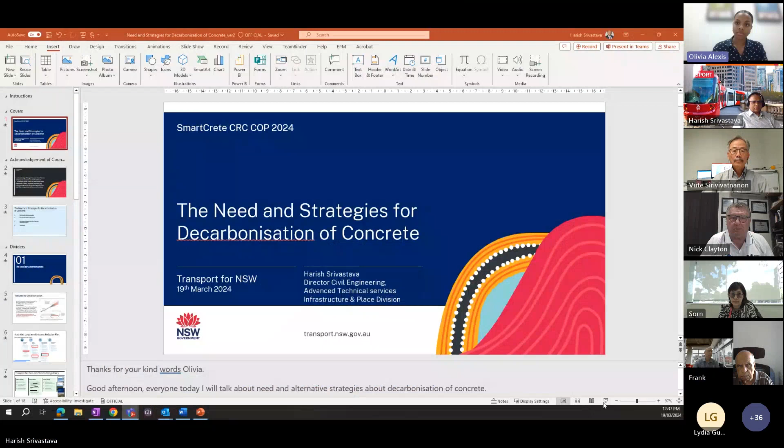Thank you, thanks Olivia. I'll try to share my screen. Please let me know if you can see it. Can you see it well? That's perfect. Thanks Harish.

Okay, thanks Olivia for your kind words. Good afternoon everyone. Today I'll talk about, at a high level, decarbonization, where I'll touch on both the need and strategies for decarbonization of concrete, to be specific.

Before I go any further, I would like to acknowledge the traditional custodians of the land. Today I'm speaking from Ashfield, which is the land of the Wangal people. So I acknowledge the Wangal clan of the Eora Nation and pay my respect to the traditional custodians of the land on which we meet, especially elders past and present, and acknowledge other Aboriginal people here and their respective cultures and nations.

The content of the presentation is in three parts. One, I'll talk about decarbonization in general, then drill down into why decarbonization of concrete is required, and then how SmartCrete CRC research projects help with this decarbonization.

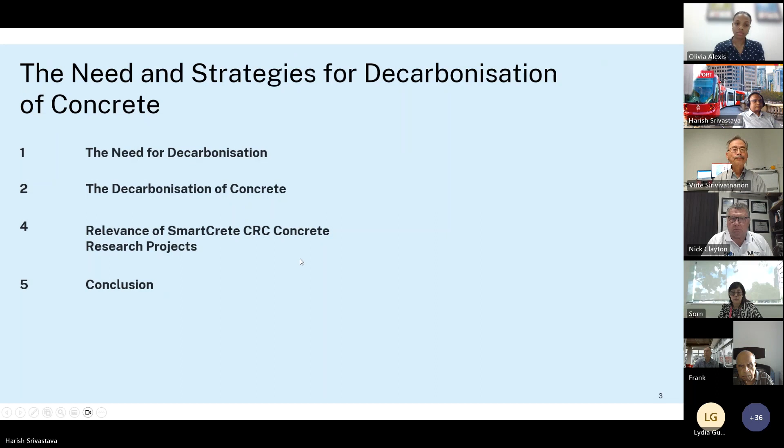So first is about the need for decarbonization. As all of us know, signatories of the Paris Agreement need to contain global warming to 2 degrees Celsius above pre-industrial level, whereas the preferred level envisaged is 1.5 degrees Celsius. What got me a bit concerned reading the IPCC 2021 report is that it envisages a 50% likelihood of exceeding 1.5 degrees Celsius in the near term. So that means we need to do something to contain global warming.

Global warming or carbon dioxide emissions is a bit of a buzzword, so I tried to establish a linkage between the two. If you look at the picture on the right, taken from the IPCC 2021 report, it essentially establishes the relationship between global warming and carbon dioxide emissions. Without getting into the nitty-gritty of the graphs, curves, and sectoral emissions, I'll try to contain myself to construction sector related matters.

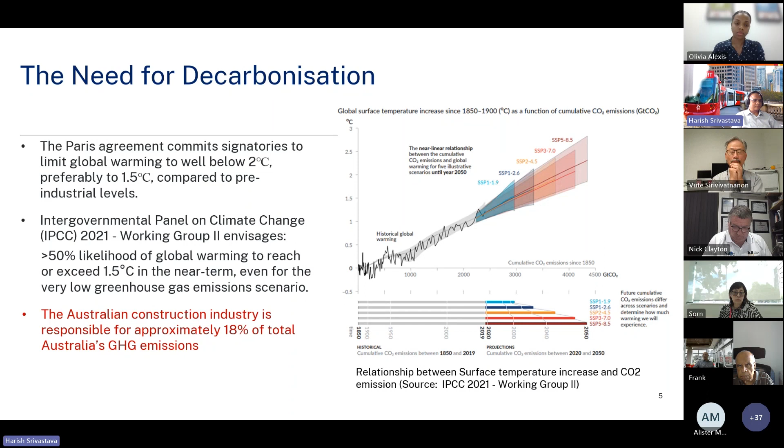The Australian construction sector is responsible for about 18% of Australia's greenhouse gas emissions, so this is a critical part of the net zero equation. This is the Commonwealth government's long-term emission reduction plan, with four streams and a lot of initiatives. I've highlighted in red the initiatives related to the construction sector - for example, low emission steel and aluminum is very much essential for construction sector decarbonization.

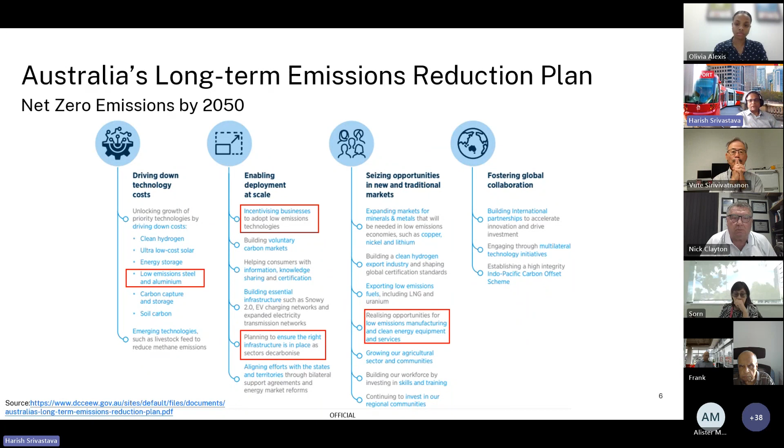Similarly, probably one of the ways we can encourage decarbonization is by incentivizing businesses. I don't intend to read every box, but this draws from top to bottom so that we have a bit of context setting.

Drawing on this Commonwealth government plan, Transport has developed these sub-plans as part of its decarbonization policy. You're welcome to read these at your own leisure - I've just put some snapshots so you get the title and name of the documents, and they are available publicly. Essentially, the policy is to drive both operational and embodied carbon to net zero by 2050.

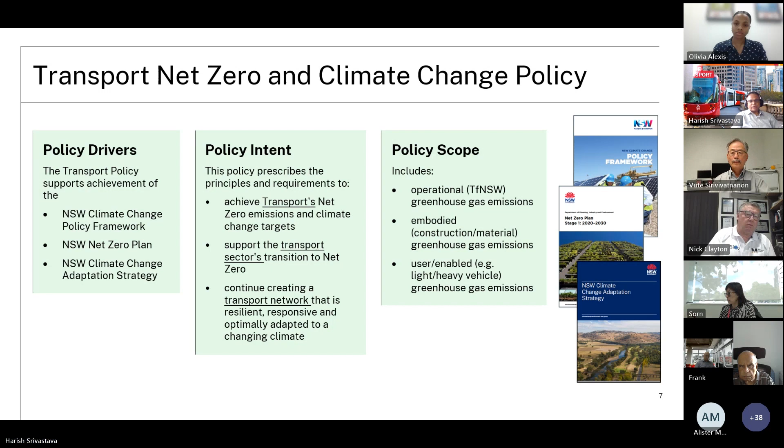Going a step further, Transport recently published an updated version of the policy including its commitment. Transport is committed to...

Transport's commitment is to achieve net zero for embodied carbon emission by 2045, and sector-wide net zero emission by 2050. But this will be done in a staged manner, and this slide highlights the stage plan. I don't intend to go line by line, but the message is we are trying to achieve carbon net zero in stages.

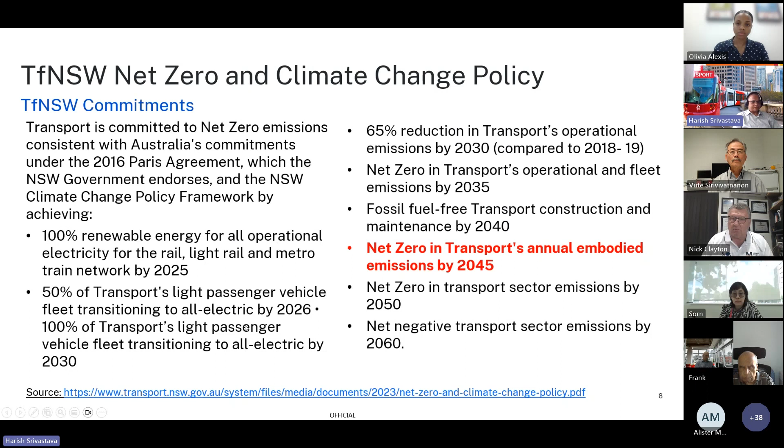Now I'll talk about something engineers like more - how we can achieve decarbonization of concrete. The first logical question is, why concrete? Looking at all construction materials, concrete has one of the lowest embodied carbon footprints compared to materials like steel and aluminum. Whereas we use a lot of concrete, and that's why it becomes a critical material.

There are some numbers here - 29 million cubic meters of concrete used in Australia. Focusing on structural concrete, the carbon footprint of concrete is anything between 230 to 615 kilograms per cubic meter. Combining the two, about 12 million tons of CO2 is basically associated with concrete. Looking at the picture on the right, out of all these materials, Portland cement is the highest emitting material in concrete. Though we use only 12 to 15% cement in concrete, it is responsible for about 90% of the CO2 - that's why most strategies revolve around eliminating or reducing Portland cement.

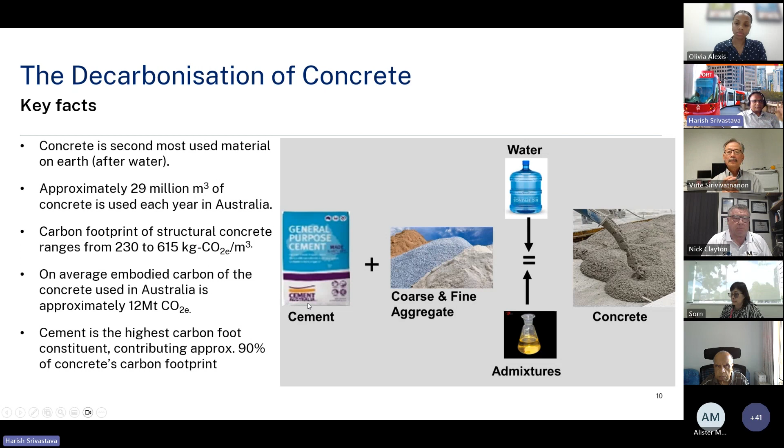At the moment, the impetus is partially replacing cement with SCM. Everybody talks about more SCM, but I guess we probably need to embrace new zero cement technologies like geopolymer concrete, sulfur concrete, LC3, just to name a few.

Then going up in the cycle, the next one is water. At the moment we use recycled water and steam curing, but probably we need to move to CarbonCure type technology, where we inject carbon dioxide both while batching and during the curing process. The advantage of this is, first, it locks the carbon dioxide into the concrete, supporting carbon storage. Some papers have reported up to 20% strength improvement can be achieved by injecting carbon dioxide, so it has a dual benefit.

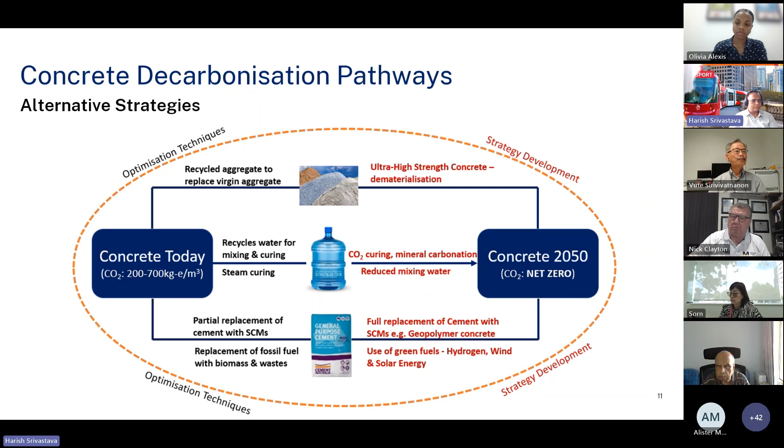Now I'll try to link up that circular diagram with whatever project transport is involved with the SmartCrete CRC. If we look at these five projects on screen, they can potentially be categorized into generating new aggregate by using recycled material - for example, recycled glass, plastic waste, mine waste. These were not conventional aggregates, so we get into manufactured aggregate.

Then the other important thing is using, say, bottom ash. We use fly ash a lot, but bottom ash is probably another potential material that can be used both as aggregate as well as SCM.

We are also trying to develop some new stream of SCMs, for example this manufactured amorphous silica. This is an interesting project because it comes out of the carbon dioxide injection process, so its source is carbon dioxide injection. The overall process is intending to absorb and store the carbon dioxide, and the byproduct is amorphous silica, which we are trying to use in concrete both as SCM as well as aggregate.

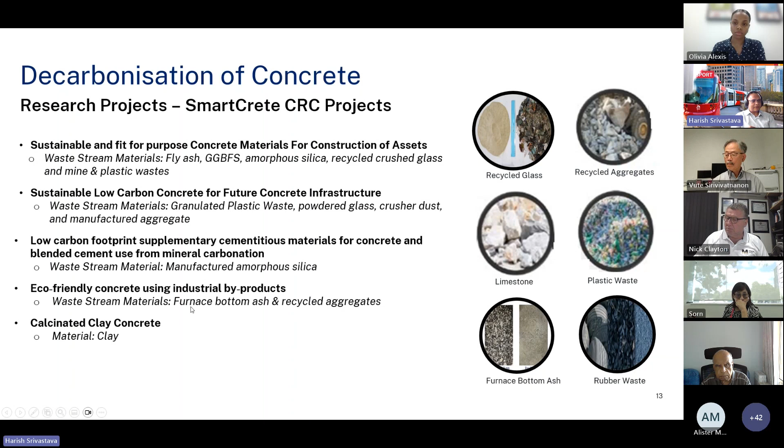Another thing not on this slide, because this project is in development - we are trying to develop a project for design guides and specifications for ultra high performance concrete to be used in infrastructure, which will support decarbonization.

Then there are a couple of interesting projects - the first one Professor Vute will talk about a lot in his presentation, so I don't want to double up, but the intention is to develop a framework for selecting low carbon concrete. We are not trying to stop at the current generation of concrete mixes, but want to go into future mixes as well.

Then this is another interesting project which draws on the potential 6% recarbonization envisaged by VDZ. This project has a tier 2 calculation about CO2 absorption into concrete, so I think this will be a good fit for the net zero solution.

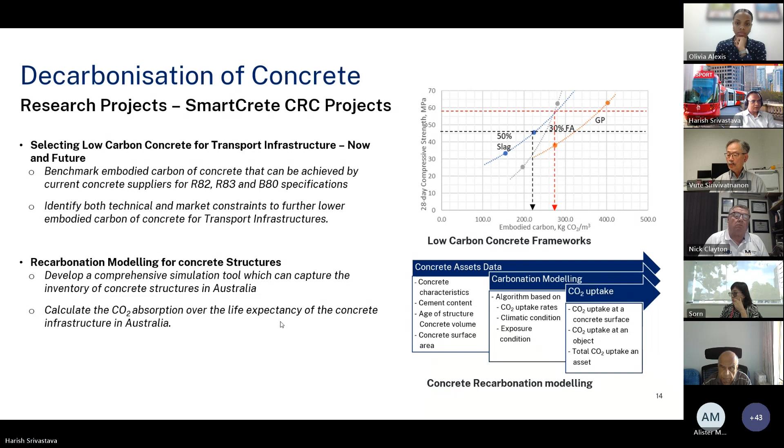So in short, I discussed various transport initiatives, policies and commitments which support net zero. Then I explained that the transport collaboration with the SmartCrete CRC is likely to generate new materials, new SCMs, and also underpin dematerialization.

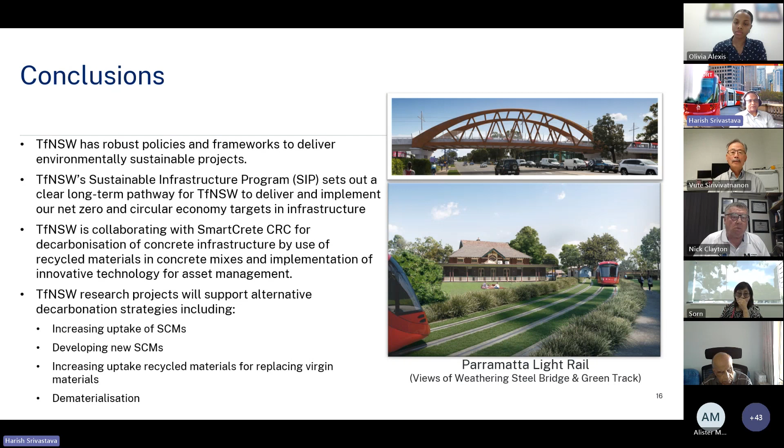Perfect. Thank you so much, Harish. Really interesting work. It's good to know what Transport New South Wales is doing currently and where they see the next stages to this industry collective goal in regards to how we're going to reduce and decarbonize our industry.

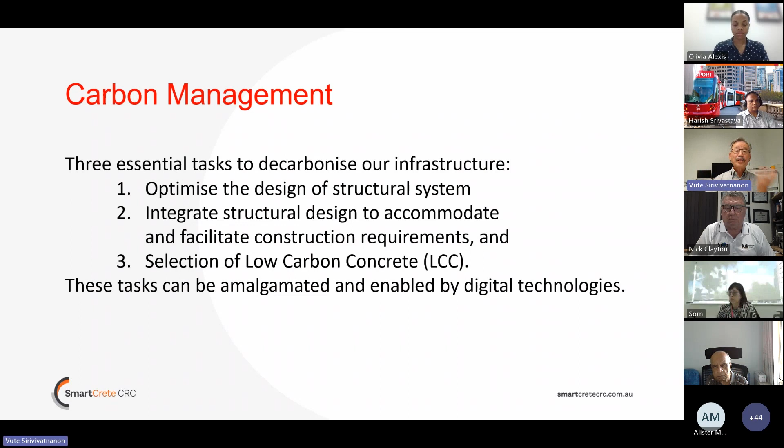My definition of low carbon concrete is very simple and straightforward. Low carbon concrete is user-friendly type of concrete with good workability, constructability, and safety in handling and so forth as well. It must have the mechanical and volume stability properties that are required for the structures in question. And finally, it must have the durability properties related to the design life required for that particular structure in the particular exposure environment in question. Now, all these must be achieved at the lowest possible embodied carbon. So, a very simple definition of low carbon concrete.

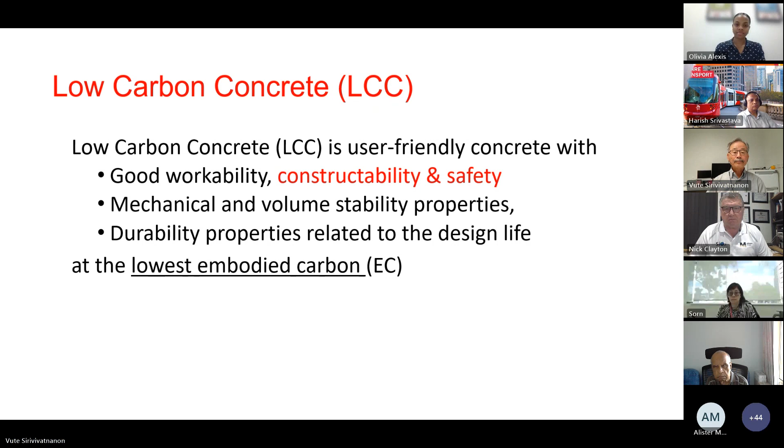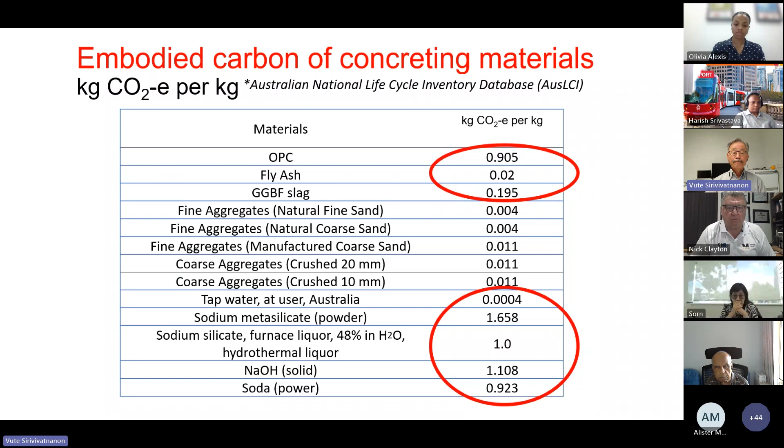And last of all, durability properties. Apart from the normal exposure, either carbonation-induced corrosion issue, chloride-induced corrosion issue, or sulfate, don't forget about the possible deterioration mechanism due to alkali-silica reactivity, and also the possibility of delayed ettringite formation, which may affect concrete that is cured at very high temperature.

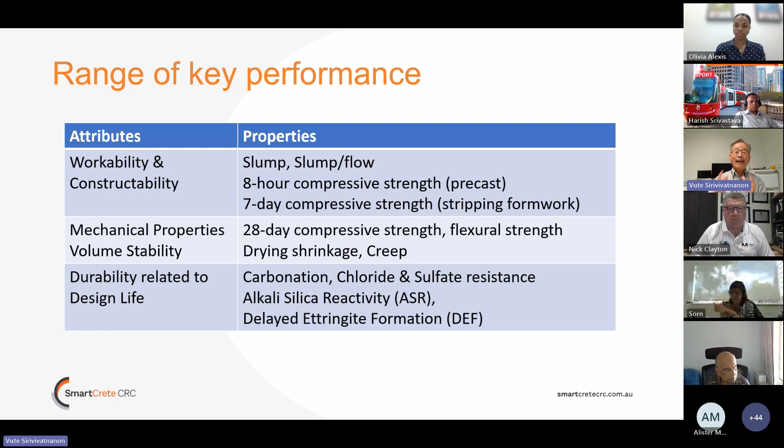Now, if we look at a typical specification for concrete, I use the example here of Transport for New South Wales B80 specification. And in particular, I just choose a particular exposure of B2. What you can see is that the specification consists of two parts. One is the prescriptive requirement in terms of cement content and water to cement ratio, as well as the performance-based requirement in terms of strength grade, and in this case, maximum chloride diffusion coefficients, depending on the specific test method that are required.

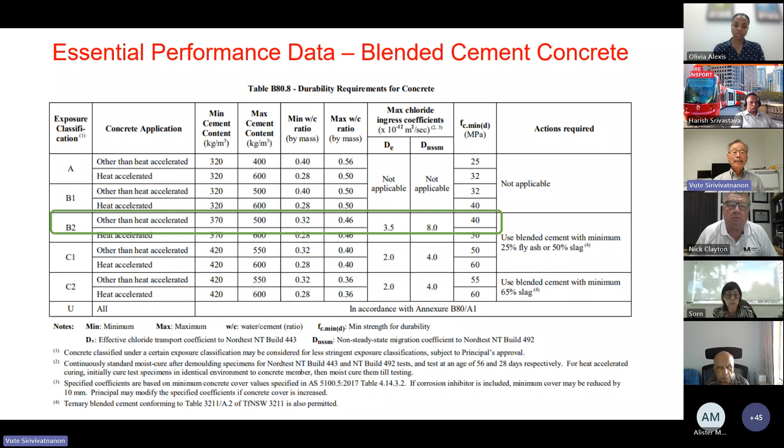I use this particular specification to show you that in the area of using SCM to produce blended cement concrete, the influence of the type of binder is so high insofar as it affects the embodied carbon of the concrete in question.

If you look at the 28-day strength, for instance, you can clearly see the influence of concrete with either just GP cement, 30% fly ash, or 50% slag on the embodied carbon of the concrete that will meet a particular strength grade requirement. In this case, the slag came up best with the embodied carbon just around 220 to 230 kilogram carbon dioxide per cubic meter of concrete.

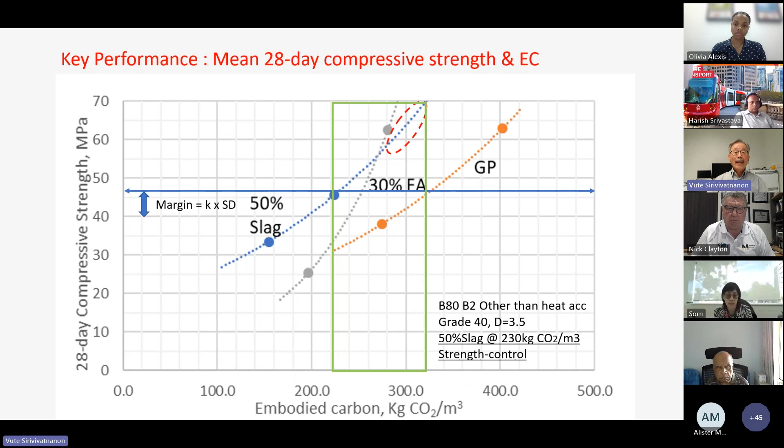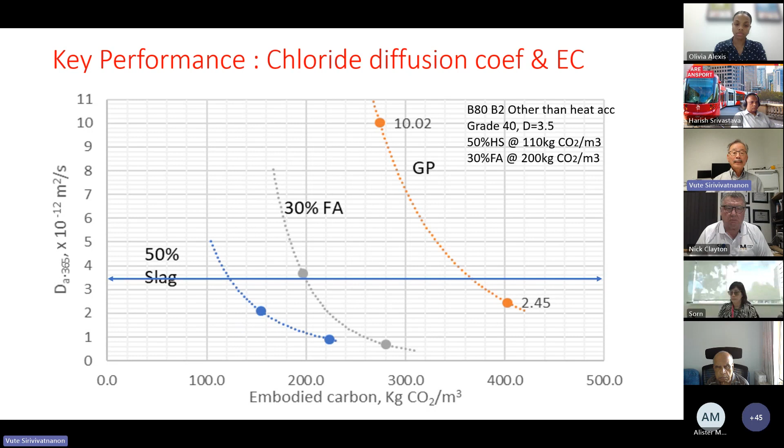Apart from strength and mechanical properties, we also require durability properties. Again, I show you the example of the influence of the type of binder on chloride diffusion, and what sort of embodied carbon would result from the choice of particular binder used to produce your concrete. In this case, looking at a diffusion coefficient of around 3.5 times 10 to the minus 12 meters squared per second, the 50% slag seemed to be the best among the three binder systems shown here.

At the end of the day, though, you need to choose the best concrete that meets all your performance requirements. I'm merely showing you two performance requirements here, 28-day compressive strength and chloride diffusion, and that's basically the combination of the two data sets I showed you earlier.

In this case, if you choose the 50% slag to produce a grade 40 concrete, it would demand about 230 kg of CO2, and that corresponding 50% slag mix will give you a diffusion value of around 1 times 10 to the minus 12 meters squared per second, well below what is specified. So in this example, it's the strength that basically controls the choice of your low carbon concrete needed for that particular exposure condition and application.

If this happened to be precast, the early strength may be the controlling factor. The point is that you need to look at all the performance requirements and the respective embodied carbon of the concrete you use to come up with concrete that meets all those performance requirements.

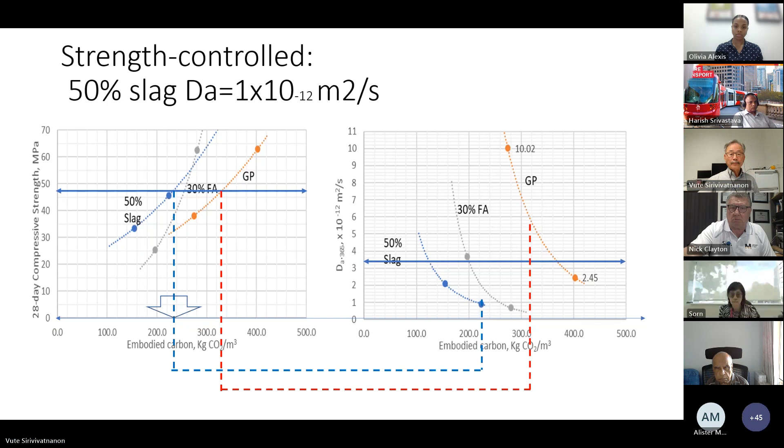I'll now quickly go through some of the data we have collected for geopolymer concrete. I'm sure most of you are aware that late last year, Standards Australia released the technical specification TS199, which covers the design of geopolymer and alkali-activated concrete structures. I think this particular technical specification would support greater confidence for engineers to start looking at the use of geopolymer concrete more seriously.

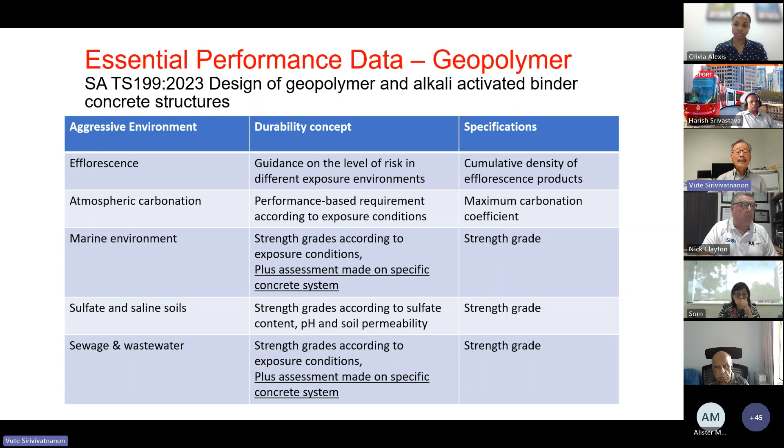I summarize the type of aggressive environment that has been defined, and also what type of durability concept is used in that technical specification 199. I would also show you just a couple of sets of data, showing the relationship between different geopolymer concrete and a range of other concrete with SCM on embodied carbon with respect to strength and durability.

Just an example: the circles with the darker color, whether black or blue, represent the geopolymer concrete. You can see that for the sort of strength we are looking at, geopolymer concrete would give a much lower embodied carbon than the sort of concrete I've just shown you in terms of concrete with high SCM. So it's a very good start in terms of strength.

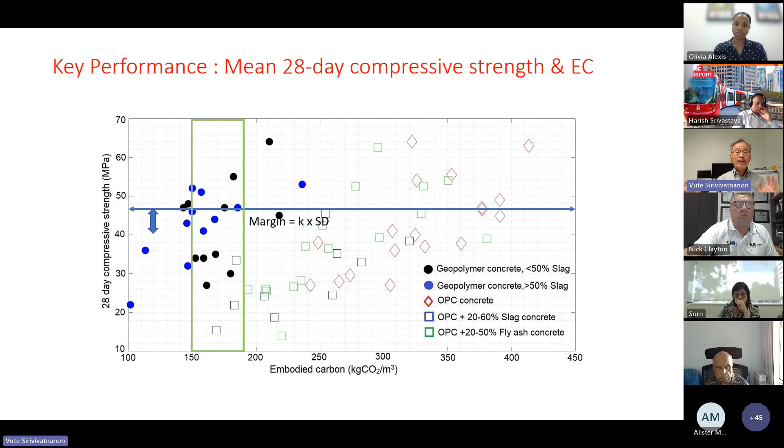Now, if we look at durability, in terms of chloride coefficient, but this is using test method 443, which is an accelerated chloride diffusion test method. You can see that for the sort of level we are looking for, a very low diffusion coefficient of around 4 to 8 times 10 to the minus 12 meters squared per second...

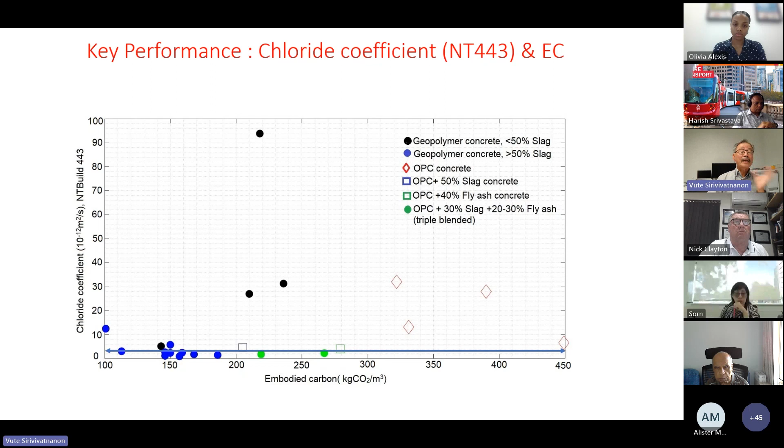Only one type of geopolymer concrete is likely to give you that performance, and that is the blue color, representing geopolymer concrete with more than 50% slag. Whereas the other concrete, with lower than 50% slag, although giving the strength you may need, gives a much higher chloride diffusion value and therefore will not satisfy the durability requirements.

So that's the challenge. Again, I relate the two performances into one, and basically what it says is that yes, geopolymer concrete, certain types of geopolymer concrete, does have a very good potential to be used with much lower embodied carbon than the concrete with high SCM that we have.

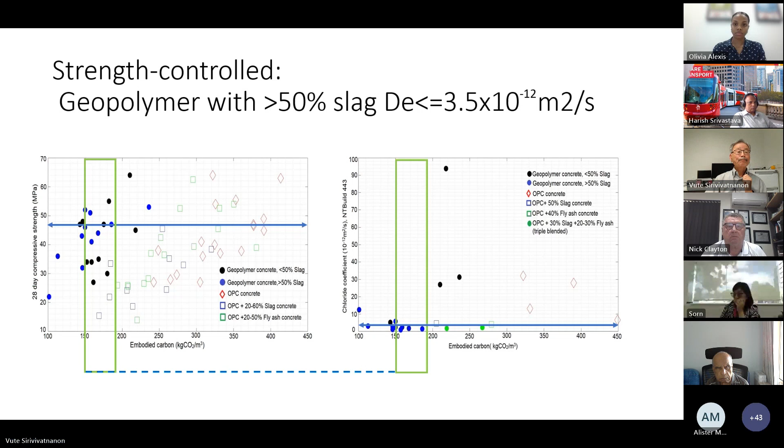So I won't conclude. I merely want to emphasize that you need good performance data to enable you to select the binder system or the concrete to produce the best low carbon concrete for your applications. And this is where I will end my presentation and hand it back to Olivia.

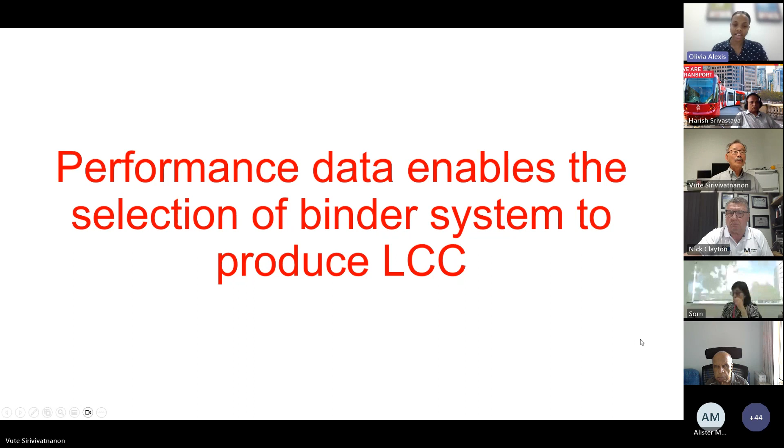Perfect, thank you, Vute. I think it's really good that you started your presentation with your own definition of what low carbon concrete is, because that's been quite a topic in the last few weeks - how do we even define low carbon concrete, because in my opinion we are already achieving low carbon concrete. So it's good to look at what we're currently doing, what we can do to improve it even more, and what the future holds in order to achieve our 2030, 2050 goals. Once again, I'd like to thank Harish and Vute for your presentations - really interesting work. Now it's time for questions and discussion.